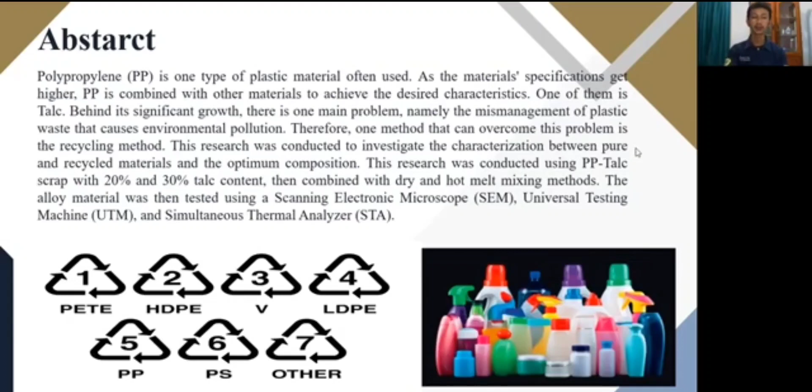Next, introduction. Polypropylene is a material whose use is very dominant because PP has good characteristics, such as low density, good heat and humidity resistance, and stable dimensional resistance. The addition of talc to PP causes the resulting product to become more rigid so that the strength of the material can be increased without having to increase the thickness of the product dimension. It makes PP with a mixture of talc one of the materials widely used in injection molding applications, especially for automotive.

Behind its significant growth, there is one main problem, namely the mismanagement of plastic waste, which causes environmental pollution. One way to reduce environmental pollution is by recycling. Two methods can be used, namely primary recycling and secondary recycling. Primary recycling refers to the reuse of a product in its original structure. Research related to primary recycling was carried out by Guerrica-Echevarria, a researcher on polypropylene waste recycling.

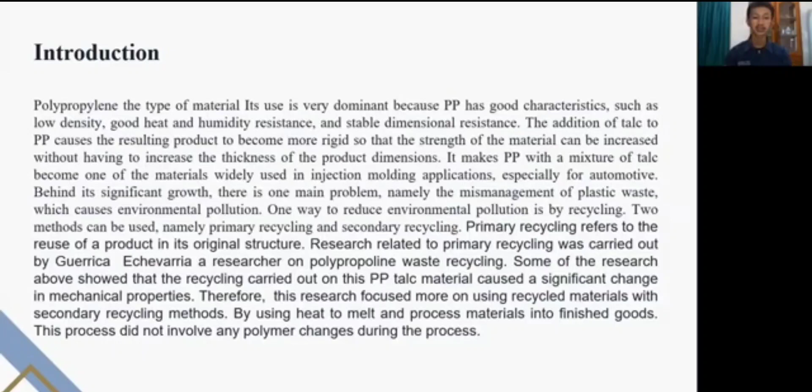Some of the research above shows that the recycling carried out on this PP talc material caused a significant change in mechanical properties. Therefore, this research focused more on using recycled material with the secondary recycling method, by using heat to melt and process material into finished goods. This process did not involve any polymer change during the process.

Method. Material. This research used the remaining product that uses PP talc as raw material. The remaining product was obtained from the radiator net support product and the left drawer cover. Support radiator net was a product that used PP as raw material with a mixture of talc as much as 20%, or PT20, of the material mass. While the left drawer cover uses PP raw material with a mixture of talc as much as 30%, or PT30, of the material mass.

Product preparation. Batch materials were recycled by the regrinding process and mixed with specific composition. Product preparation was carried out in two steps: one, dry, and two, hot melt mixing. The first step, the dry mixing method, was carried out using a Henschel mixer with a capacity of 500 grams with a stirring speed of 1500 rpm with a duration of 3 minutes for each sample. It was done to ensure that the two ingredients were well mixed and to remove moisture that accumulated during the storage of the ingredients.

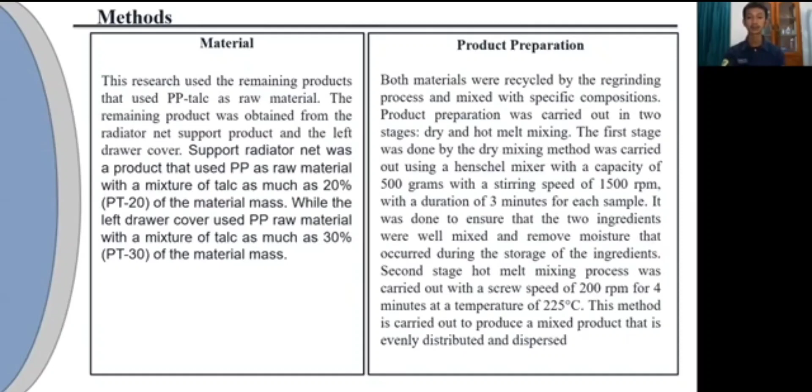Characterization. 1. Scanning electron microscope or SEM. This test prepared the PP talc sample by freezing with nitrogen and breaking. The results of this test were morphological changes that occurred in the material due to the recycling process. 2. Simultaneous thermal analysis or STA. This test was conducted to determine the thermal behavior of the recycled material. It was caused by the possibility of material degradation of PP talc and the possibility of change in the material melting point.

And 3. Universal Testing Machine or UTM. The PP talc sample that has been treated with hot melt mixing was then prepared to be a test sample in the form of a microtensile test sample with dimensions of about 1 millimeter thickness, about 15.5 millimeter gauge length and about 5.5 millimeter width. The microtensile test sample preparation was made by hot pressing the PP talc sample mixed with the hot melt mixing method into the microtensile test sample mold.

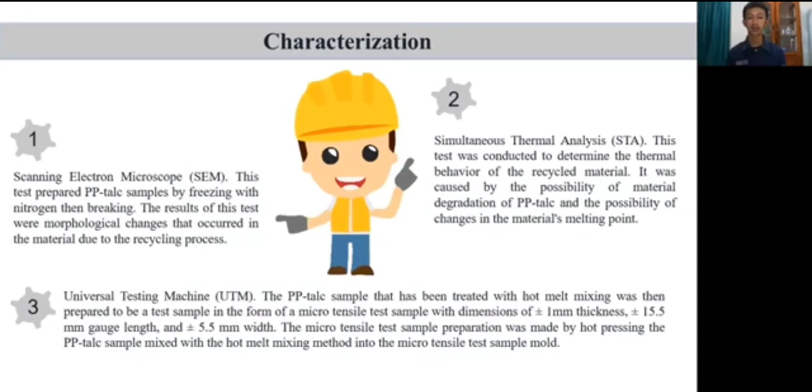Result and discussion. Product characteristics. The characterization of raw material was carried out using UTM and SEM. The results of testing the modulus of elasticity and tensile strength of PP talc can be seen in the table.

You can see in the table: Number 1, material type PP talcum 20% or PT20. Testing method ASTM D1708-06. Modulus of elasticity, MPa: 111.7. Tensile strength, MPa:

24.6. Number 2, material type PP talcum 30% or PT30. Testing method ASTM D1708-06. Modulus of elasticity, MPa: 179.2. Tensile strength, MPa:

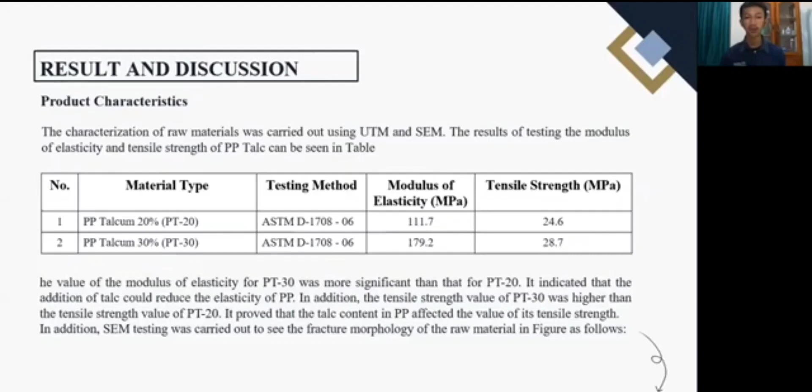In addition, SEM testing was carried out to see the fracture morphology of the raw material in the picture as follows. You can see in the picture the fracture morphology comparison between picture A, PT20, and picture B, PT30, with 1000x magnification. At PT20, the fracture surface still had a slightly dark color.

PT30 in figure 1b had a fracture surface that resembled PT20 in figure 1a. The fracture surface was still dominated by PP and had dark and light color surfaces. However, PT30 had a more even dark surface dispersion than PT20. This uniform dark surface dispersion suggests that PT30 became more brittle than PT20.

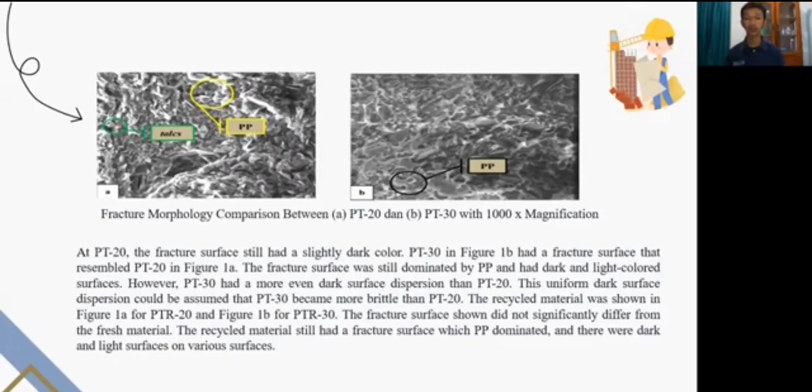The recycled material was shown in figure 1a for PTR20 and figure 1b for PTR30. The fracture surface shown did not significantly differ from the fresh material. The recycled material still had a fracture surface which PP dominates, and there were dark and light surfaces on various surfaces.

The effect of waste composition on composite morphology. The comparison between the alloy material of PTR20 and PTR30 can be seen in the figure. Fracture morphology comparison: A, PTR20 10%, PTR30 90%; B, PTR20 50%, PTR30 50%; and C, PTR20 90%, PTR30 10%, with 1000x magnification.

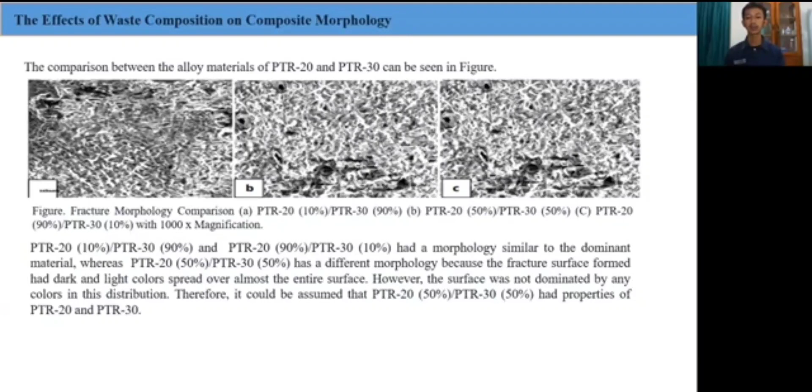PTR20 10%, PTR30 90%, and PTR20 90%, PTR30 10% had a morphology similar to the dominant material, whereas PTR20 50%, PTR30 50% has a different morphology because the fracture surface had dark and light color spread over almost the entire surface. However, the surface was not dominated by any color in the distribution. Therefore, it could be assumed that PTR20 50%, PTR30 50% had properties of both PTR20 and PTR30.

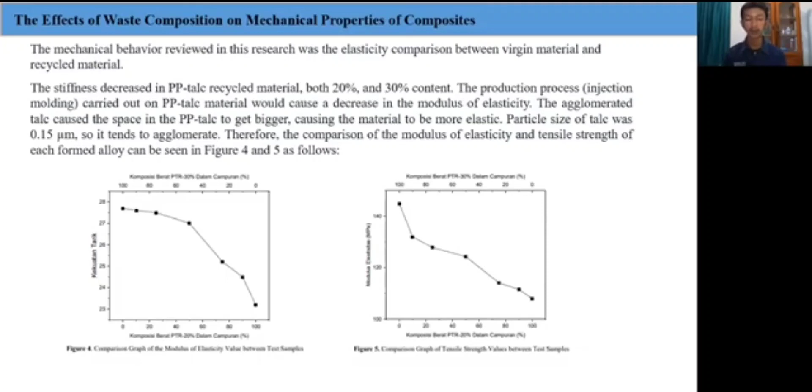In this picture, the values of the modulus of elasticity and tensile strength of the alloy material decrease along with the increase in the composition of PTR20 in the alloy. So in figures 4 and 5, it was also experienced in the value of the modulus and tensile strength. From these two observations, it can be assumed that the alloy material had a mechanical behavior that resembled the dominant material.

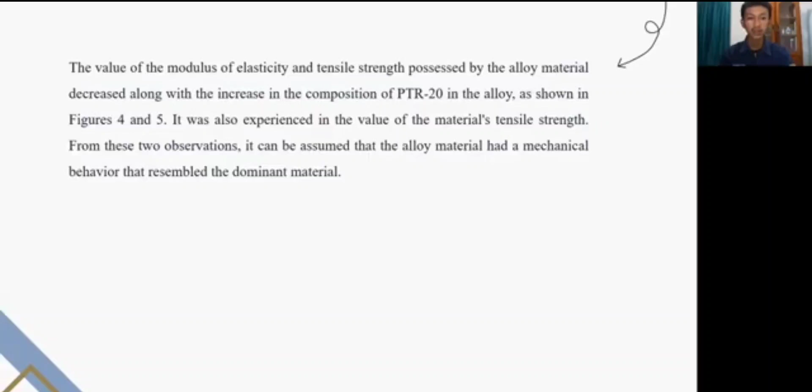Thermal properties of composite. From figures 6 and 7, the more talc content in the composite, the lower the melting point of PP talc. It indicated that the addition of talc in PP will not affect the melting point value of PP.

Based on figure 8, the thermal stability of each sample can be seen. The measurement result did not show a significant difference in the three samples. Up to a temperature of 300 degrees Celsius, all three experienced a decrease in mass that was not too large. The magnitude of the decrease in mass in the three samples was also not much different.

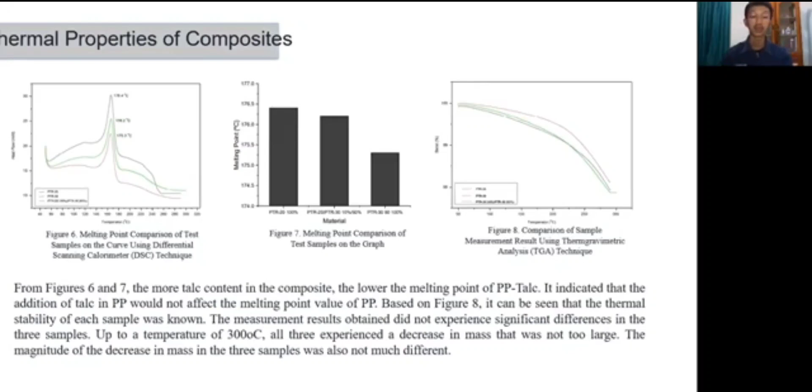And finally, the conclusion. Based on the data from the tests and analysis that have been carried out, several conclusions can be drawn, including: 1. PT30 had a higher modulus of elasticity and tensile strength than PT20. The more talc content will increase the stiffness of the composite. 2. The morphology of the recycled PP talc material did not change much compared to the virgin material.

The PTR20, PTR30 composite had a morphology similar to the dominant material. There was a decrease in the value of the elastic modulus of the recycled material compared to the virgin material. It was due to the injection molding process causing a decrease in the material stiffness due to talc agglomeration. The mechanical properties of the PTR20, PTR30 alloy tended to resemble the dominant material.

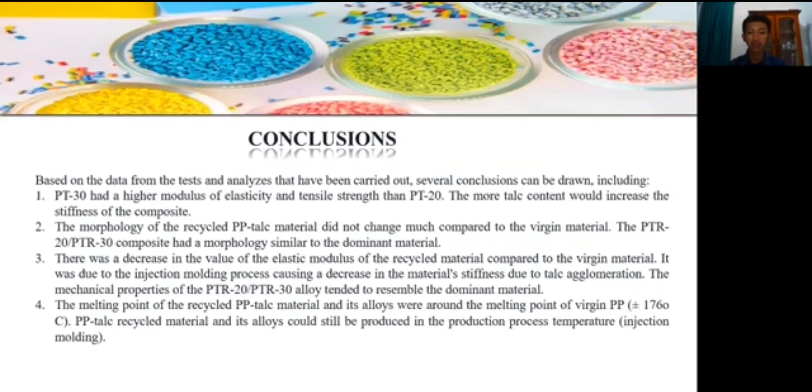The melting point of the recycled PP talc material and its alloy were around the melting point of virgin PP, more or less 176 degrees Celsius. PP talc recycled material and its alloy can still be produced at the injection molding production process temperature.